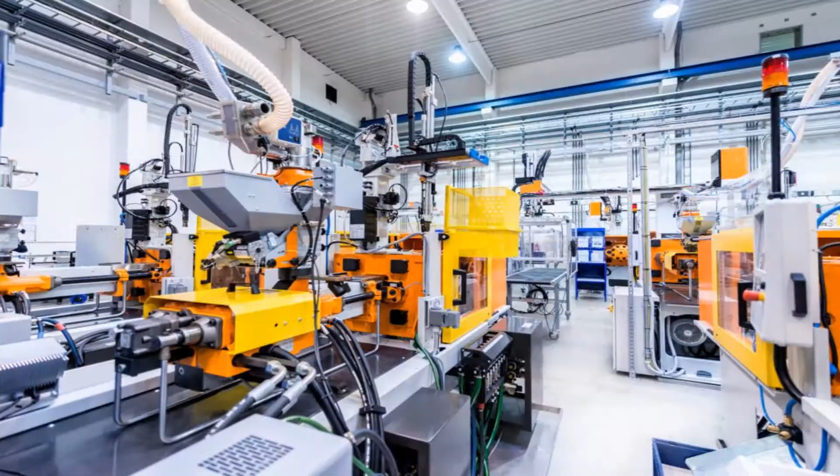Each year, production bottlenecks and mechanical inefficiencies cost global manufacturing billions. The question is, what are they costing you?

By 2020, Gartner estimates more than 26 billion highly differentiated devices will be connected to the internet, generating volumes of valuable data. How effectively and efficiently businesses can deliver actionable intelligence in a consumable way to decision makers can very well determine both their competitive advantage and opportunity for cost savings.

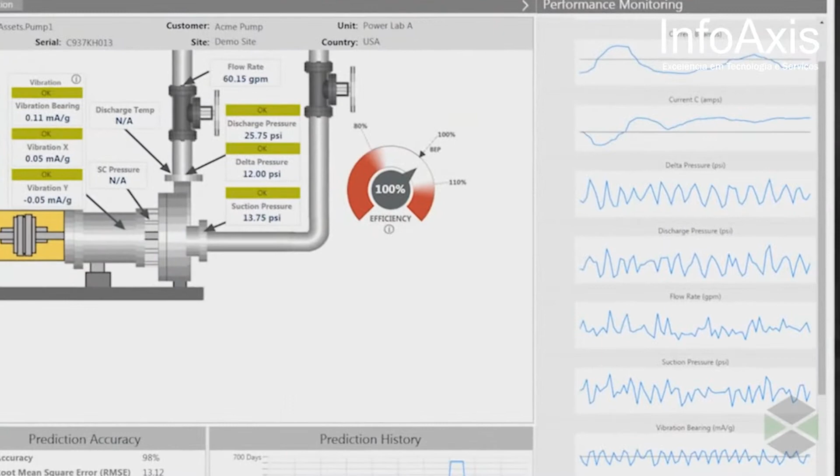The potential of this actionable intelligence is encapsulated in ThingWorx Analytics, an integrated capability of the ThingWorx platform. ThingWorx Analytics enables developers to quickly create, operationalize, and embed predictive, simulative analytics into the solutions they create. The generation of information is completely automated, enabled from within a ThingWorx-powered solution. ThingWorx Analytics delivers, analyzes, and presents clear, easy-to-follow system information anywhere in real time.

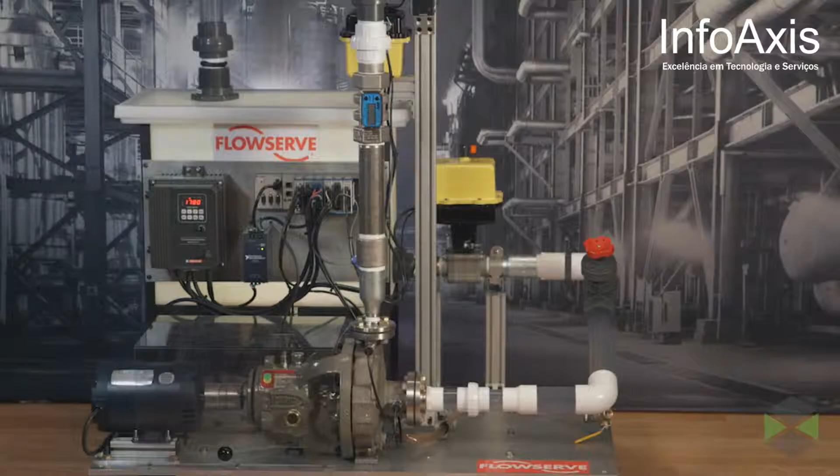So, how does it work? Let's take a look. Flowserve is a leading manufacturer of flow management products. Their pumps help move, control, and protect the flow of materials in critical industries around the world. If one of these pumps goes down, the costs and lost opportunity can run into the millions.

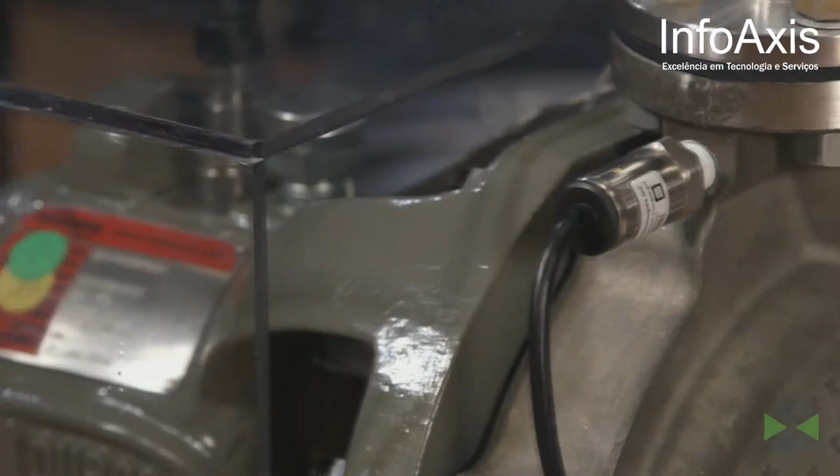This rig uses a Flowserve pump, similar to those used in critical industries to circulate water. It has been retrofitted with 6 sensors provided by National Instruments, and a high-performance computing solution from Hewlett-Packard Enterprise is enabling analysis of the data.

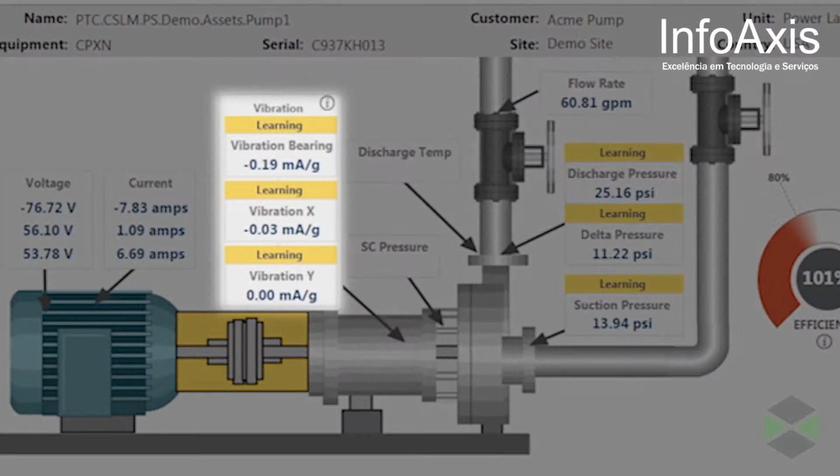ThingWorx machine learning allows you to know more, do more, and get more from a machine like this. What you're seeing at work here is the automated edge sensor analytics technology behind the platform called ThingWatcher, part of the ThingWorx Analytics capabilities. Each sensor reading that has a learning flag above it tells ThingWatcher Analytics to learn normal operating conditions. Remarkably, the automated process does not require you to predetermine any hard and fast rules.

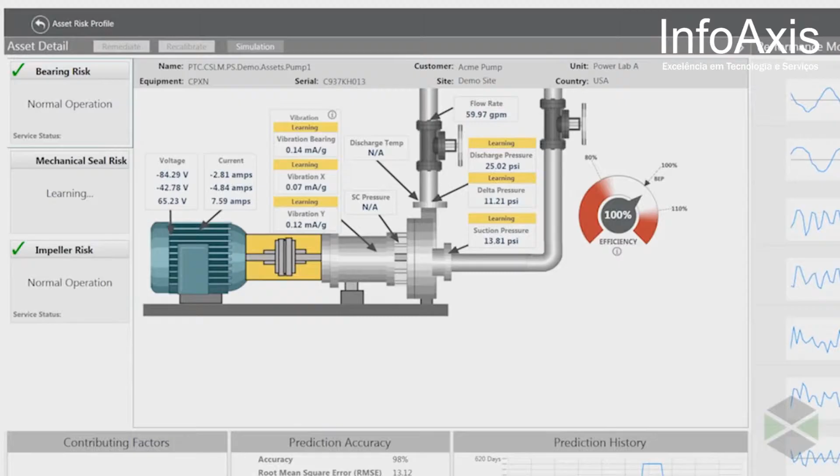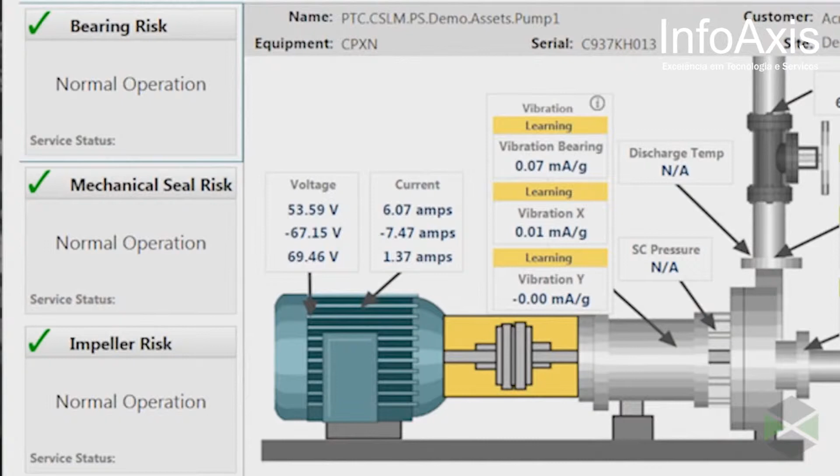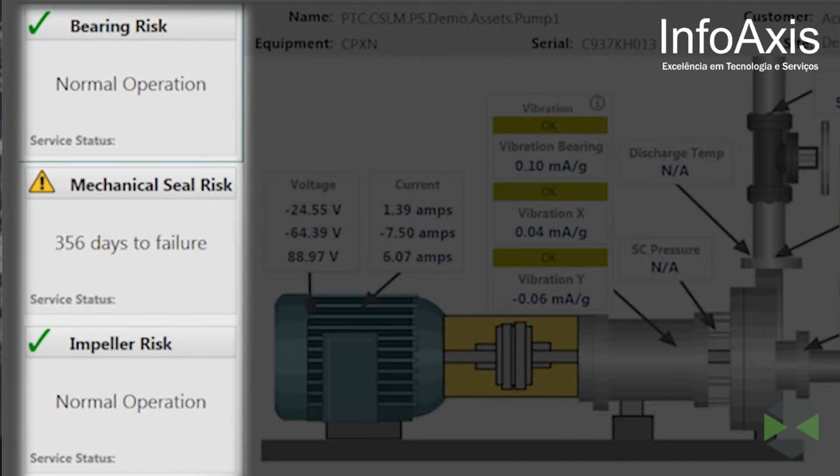It learns in real time about its environment, determining what's normal and abnormal from the sensors themselves. The software then correlates the information with peak efficiency conditions. The OK indicators you see here tell you the sensors have learned what normal is and are functioning well, with no anomalies detected. To the left, you'll see future predictions, 3 outcomes predicted by the platform's Thing Predictor technology.

The automation you're witnessing real time is ThingWorx Analytics evaluating the remaining number of days until each of these failures is likely to occur next. What's truly extraordinary about all of this is that there is no need for anyone to be constantly monitoring the machine. It is instead being self-evaluated all the time at a rate of 30,000 readings per second per sensor.

We've turned on the pump rig to demonstrate what happens if something changes or goes wrong. Let's make a few things go wrong on this pump to show ThingWorx Analytics working in real time. We're going to simulate a reduction in flow by closing this valve.

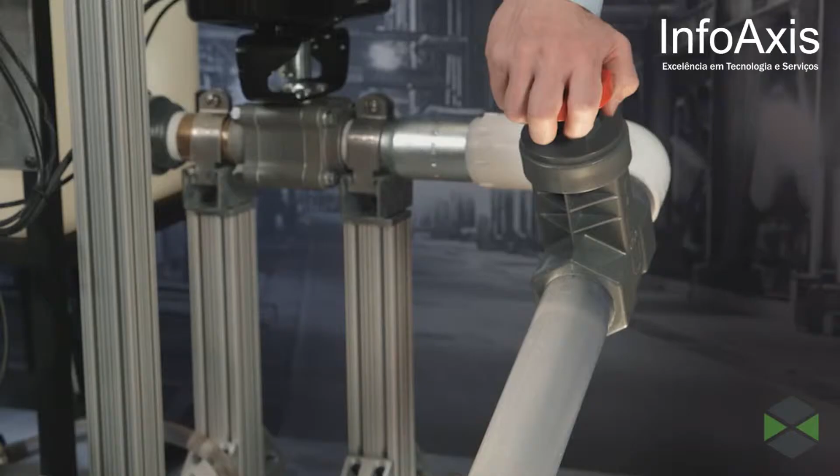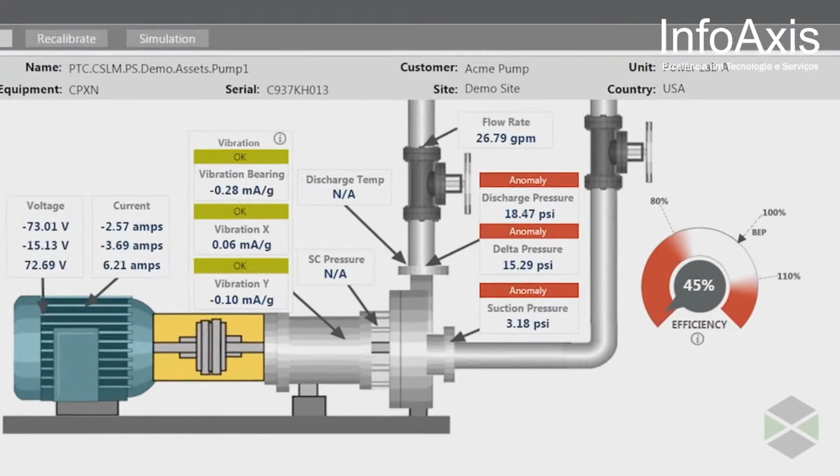As you can see, the software immediately responds to the change of flow. What's happening is that ThingWatcher is automatically detecting the flow problem and sending real-time notifications or alerts. Critical sensor readings are being flagged, pump efficiency is dropping, and the impeller is at risk of failing if the problem is not immediately addressed.

When maintenance is delivered, the numbers return to normal. So as you can see, the problem can be resolved before it becomes an expensive pump failure or serious downtime occurs. Let's throw another problem at the system and see how it works.

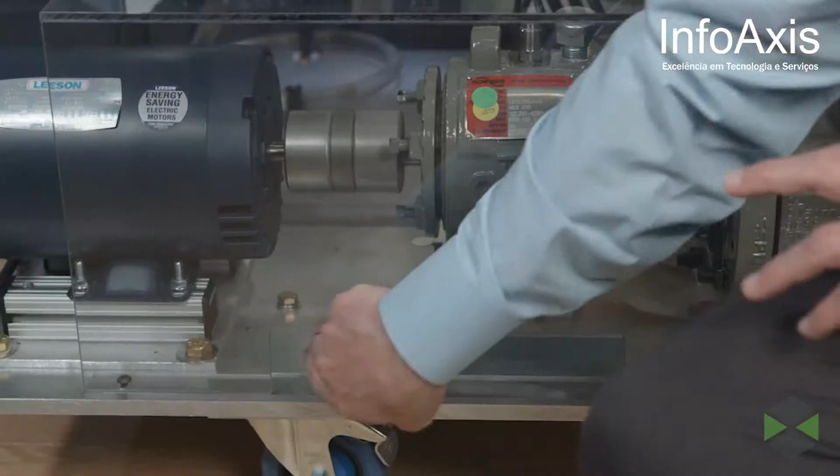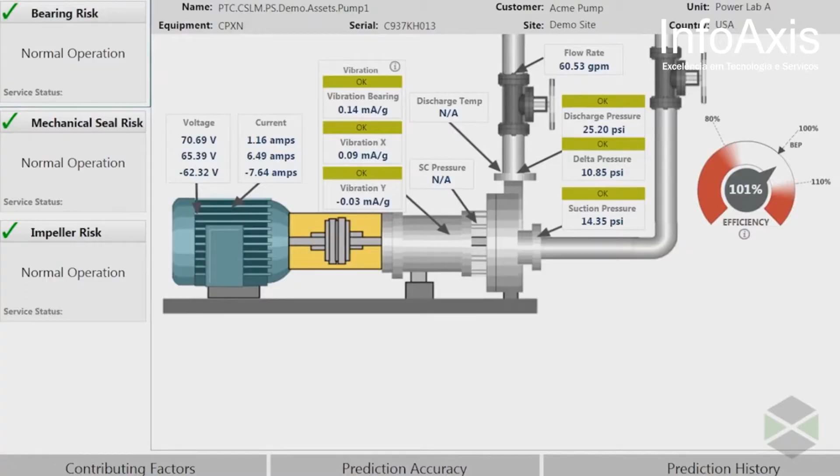I'm going to shift the alignment of the pump by lifting the main housing through the pull of this black bar. You can hear something is wrong. But let's imagine a remote monitoring situation and there's no technician around to hear this, so you need to rely on real-time monitoring. ThingWatcher is reading anomalies to flag negative changes to the pump efficiency gauge, which immediately triggers.

The system can also simultaneously send an automated phone call to a technician, alerting them of the problem. Once the problem is resolved, the numbers return to their normal state.

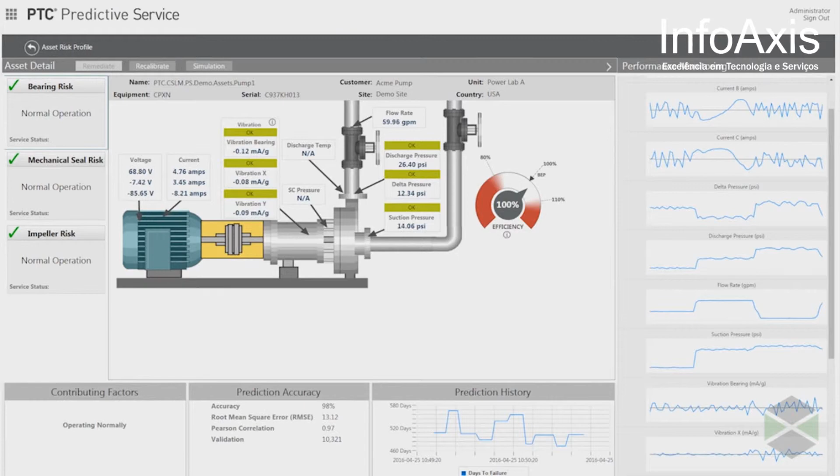You can imagine the level of control and visibility this technology can provide within your central fleet, offering an incredibly responsive view of the usage and condition of pumps all around the world from one location.

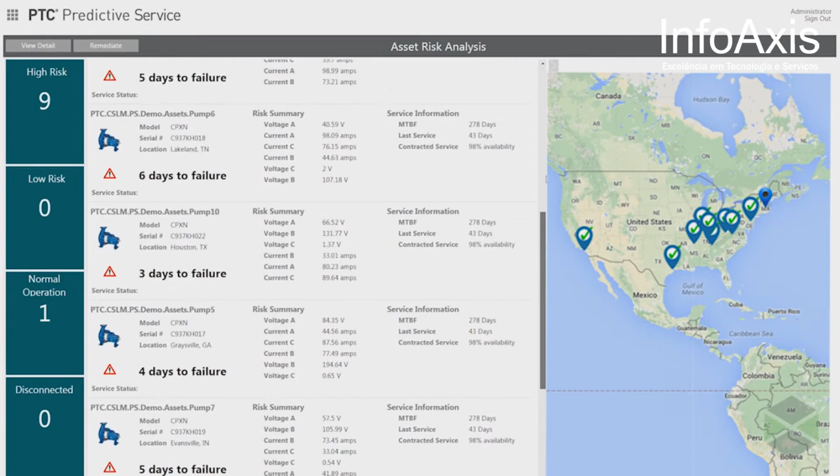This demonstration, featuring PTC's predictive service solution, is just one example of the hundreds of ways the transformative power of machine learning delivers value. Through that power, the ThingWorx platform enables unprecedented access to connected intelligence synchronized to your machines, a platform of data analysis and systems learning delivered with utter simplicity. Out of the box, the platform helps machines teach themselves using information to predict, detect, and even fix production hangups.